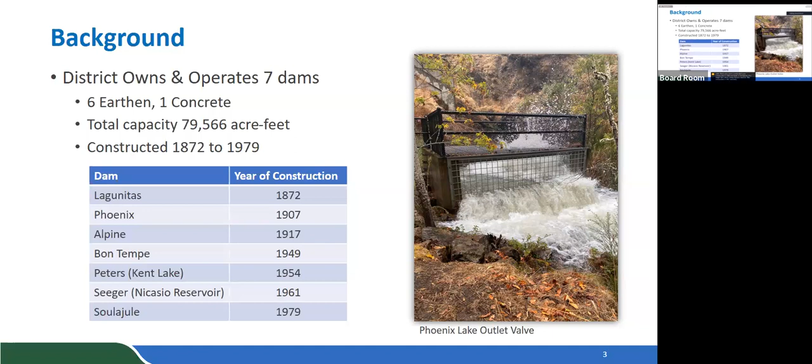Jumping right into our dam safety program. Our dam safety program has several components, each of which will be addressed in the following slides. Monthly district inspections, annual Division of Safety of Dams or DSOD inspections, real-time monitoring, and emergency response. On a monthly basis, district employees visit each of the district's 7 dams. While at the dam, they conduct a visual inspection, looking for anything that may jeopardize the dam's integrity, like animal burrows, overgrown vegetation, large holes, or slumps.

They measure the piezometers for verification of the hydrostatic forces within the dam. The map on the slide shows the 17 piezometer locations on Peters Dam. Staff also measure seepage through the dam to identify any changes from the norm. Monthly inspection is used to determine when vegetation management crews are needed. Information from this visit is documented and reviewed by engineering to look for abnormalities, which there are typically none. This data is compiled and submitted to DSOD as part of the annual report.

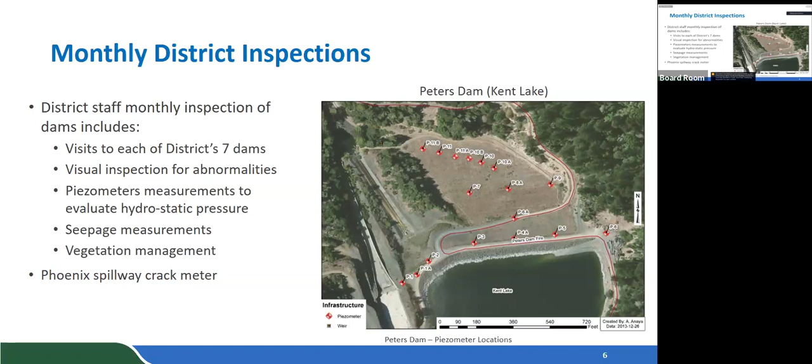On Phoenix Spillway, a horizontal crack was identified in 2005. Since then, monitoring equipment has been installed to track that it is stable. Every year, district staff meet with the Division of Safety of Dams representatives at each of the district dams. While on site, a visual inspection of the dam is conducted with the intention of identifying both changes and potential improvements. A discussion of the district's annual report allows for DSOD to clarify any measurements or comments from monthly investigations.

Emergency valves like the inlet and outlet valves used to drain the reservoir are cycled on a staggered 3-year basis. The images on the screen are of Alpine Dam, original construction in the top and current picture on the bottom. Alpine Dam was constructed with inspection galleries, which are entered every 5 years. The picture on the left is from the recent gallery inspection done this last September. The most recent instrumentation report or annual report was submitted in June of this year.

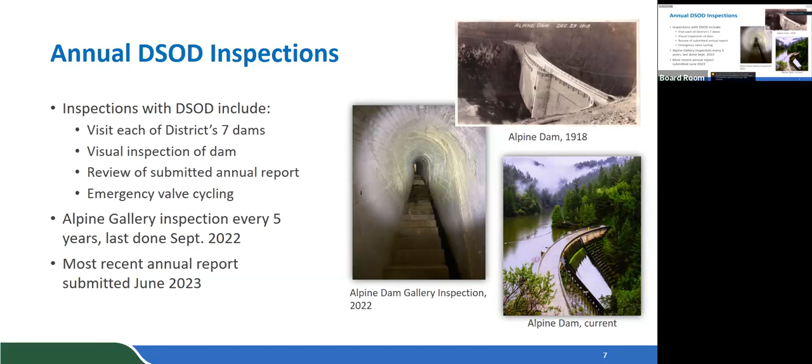We are monitoring our reservoirs in real time through our SCADA system. While monitoring is helpful, alarms have been introduced to notify operators of abnormal situations like high or low lake level or rate of change. In addition to water surface elevation or lake level, we are virtually keeping tabs on flow rates like transfer pumping and stream releases and rainfall. Alarm set points can be toggled if the operator wants to keep a closer eye on any particular reservoir.

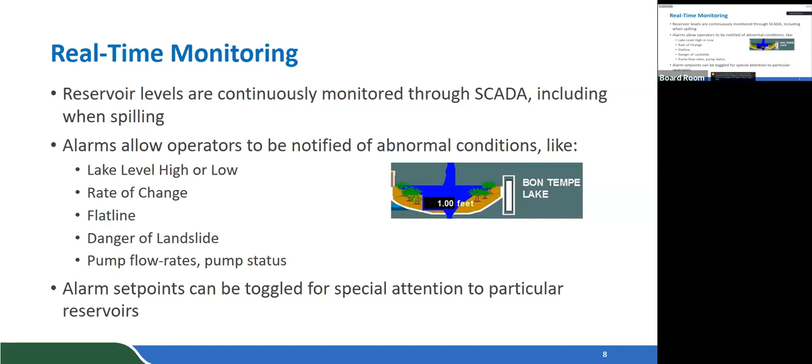Dam emergencies can vary in severity, from a mere flow-related notification to catastrophic failure, or nearly catastrophic in the case of Oroville in 2017, pictured on the slide. In line with the California Office of Emergency Services, or Cal-OES, the district has planned for dam-related emergency response using a few approaches, including the Emergency Action Plan, which lays out the response process for dam-related emergencies, everything from signs and symptoms of a dam emergency to coordinating an emergency response.

Inundation maps show the predicted emergency areas using computer modeling to be used for things like planning evacuation routes and notification lists. Response development involves coordination with many stakeholders, like the County of Marin Office of Emergency Management, to local emergency responders, to Caltrans, to the National Weather Service, and more. Routine tabletop exercises to keep emergency contacts up to date and practice of emergency notifications.

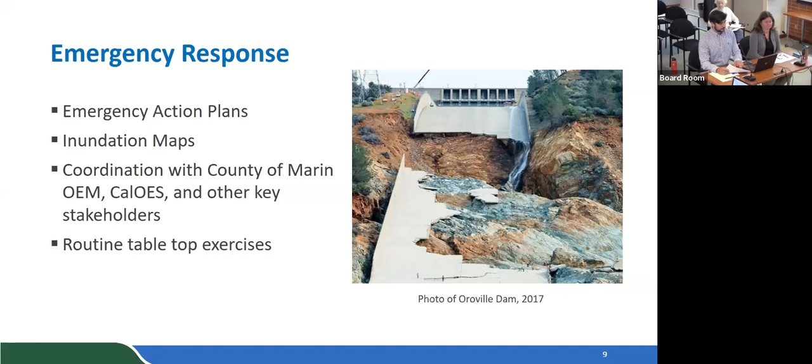Pivoting to condition assessments. Following the Oroville Dam failure, DSOD ordered the detailed evaluation of 93 dams throughout California, which DSOD believes is similar to Oroville Dam, focusing on evaluation of the concrete lining, the existing drainage system, and any potential for slab undermining and hydraulic jacking. The 3 district dams identified were Soulajule Dam in the top call out on the map, Seeger Dam, the middle call out on the map, and Peters Dam, the bottom call out on the map.

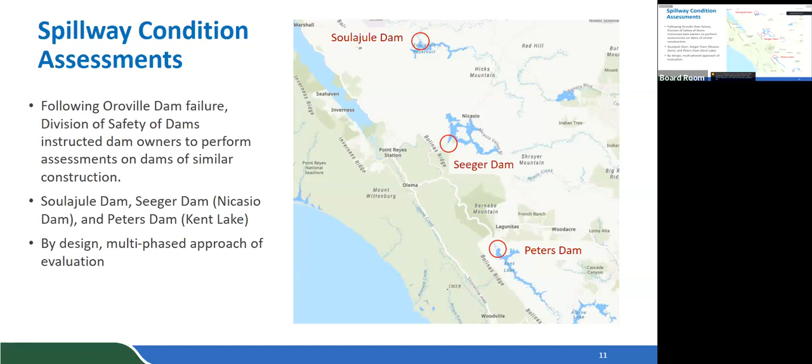In response to the evaluation mandate, a work plan incorporating both condition assessments and site investigations and a phased approach was developed, which DSOD approved in 2017. The district retained AECOM Technical Services to perform the Phase 1 assessment. Beginning in 2017, AECOM began Phase 1 evaluations through a desktop analysis of records data, including as-built drawings, boring logs, design features, previous inspections, and repair records. Simultaneously, a site visit was conducted to identify any visible deficiencies.

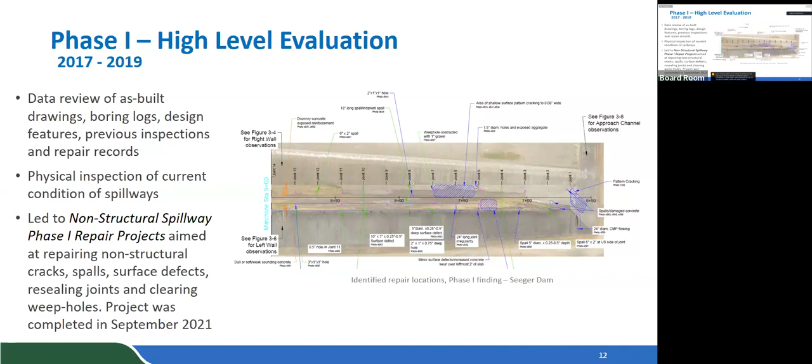Phase 1 identified specific locations for non-structural repairs, including cracks, spalls, surface defects, joint sealing, as well as weep hole clearing, all of which DSOD considered regular maintenance. These repairs were addressed in the non-structural spillway Phase 1 repair projects, which were completed in September of 2021. Phase 2 work plans, approved by DSOD in March of this year, will obtain additional field information as part of the comprehensive assessment to evaluate the current condition of our spillways. This work is expected to be completed in the fall of this year.

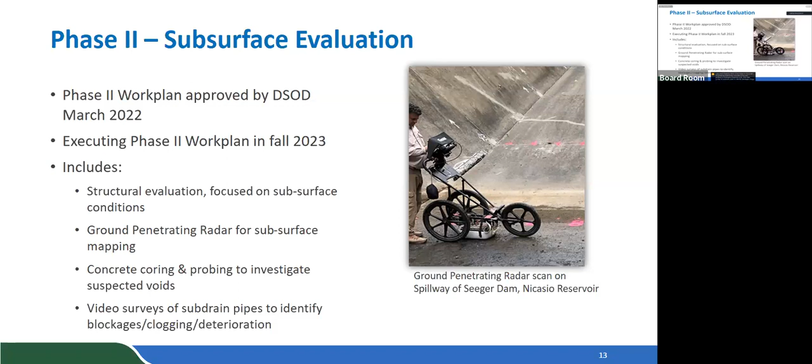The annual assessment completed by DSOD typically results in findings. To date, DSOD has determined all dams are safe for continued use. This is consistent with the monthly data that staff collect, which shows no significant changes in monthly piezometer, seepage, or leakage readings, which are reviewed regularly to identify anomalies. There are no observed changes in structural integrity. There's no significant horizontal or vertical movement in land surveying data collected annually.

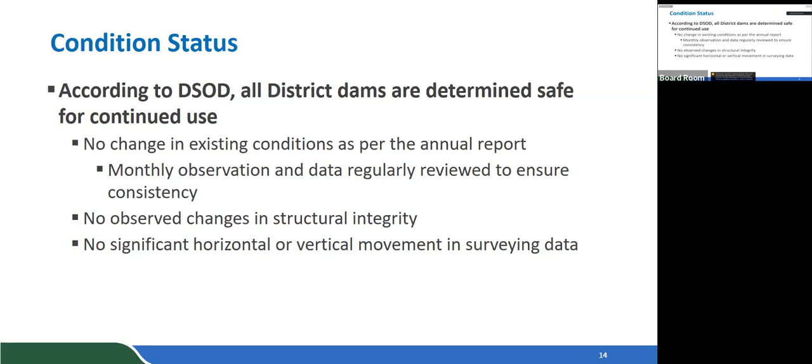Last month, the County of Marin grand jury published a report titled Dam and Reservoir Safety. Staff is still assessing the report findings and recommendations. Staff will come back to the board at an upcoming meeting with a prepared response. The underlying idea of the report identifies concerns over climate change and atmospheric rivers and effects on dams, specifically spillway capacities. The district will be hiring a dam expert to provide high-level support relating to spillway capacity analysis.

Shifting gears to routine preventative maintenance. Maintaining our dams is a lot of work. To name a few tasks in support of this effort, vegetation management is done annually and as needed. We remove logs and debris, like the picture on the right. Removing log booms is a frequent winter activity during and between storms. We exercise valves. We inspect valve actuators and clear trash racks.

We replace boulders and ensure the riprap is preventing erosion from wave action, which is the picture on the left. Other projects are done as needed and per the state inspections, like minor spillway repair, weir maintenance, and piezometer replacement. All maintenance work is done in coordination with DSOD.

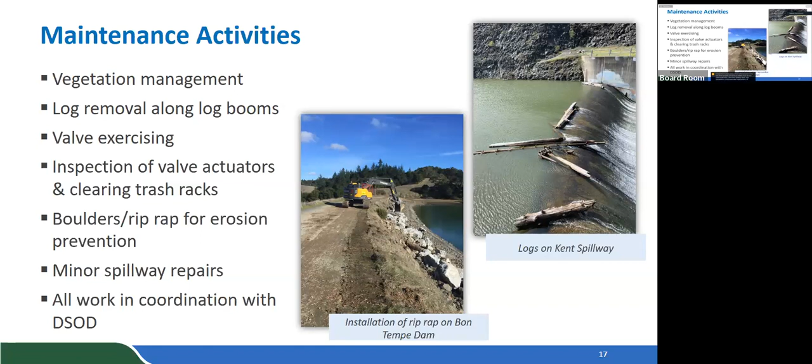Next steps include executing the Phase 2 condition assessment work plan and following up with DSOD on the results. Continue the review process for updating our dam emergency action plans, or our EAPs, and prepare a response to the grand jury report and report back to the board.

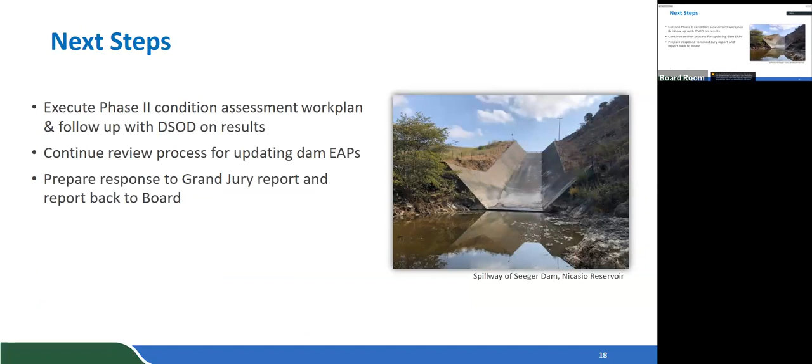Do you agree with the DSOD's characterization of our 3 dams as being similar to Oroville after doing this work? That's a good question. Thank you.

I don't know that I have enough information as to why DSOD determined those 3 dams in particular. Do I think it's a good idea to do some sort of additional investigation? I don't think it would hurt at all. I would say the one that differs slightly is the Soulajule with that big bowl at the bottom of the spillway. It's definitely a slightly different design

than Oroville. However, all 3 of those spillways that are being assessed are embedded in the earth, similar to the spillway at Oroville. So we can't see underneath them without invasive condition assessments such as borings. And the other spillways, other than Bon Tempe, you can see underneath. Lagunitas, it's a raised wooden chute. You can see the spillway underneath. Same with Phoenix, although it's concrete, you can see underneath it. So you can tell if it's leaking or if there's a crack.

Any other questions? Yeah, I guess I'm curious, did the grand jury reach out to the staff to get our assessment of how we're doing? It seems like they had quite a few judgments, but I'm wondering how deeply they talked with us. I believe unless there was discussion outside of that I'm aware of, we just got a draft report and I think that was similar to North Marin. And we did provide some comments on the draft, some of which were accepted in the final report.

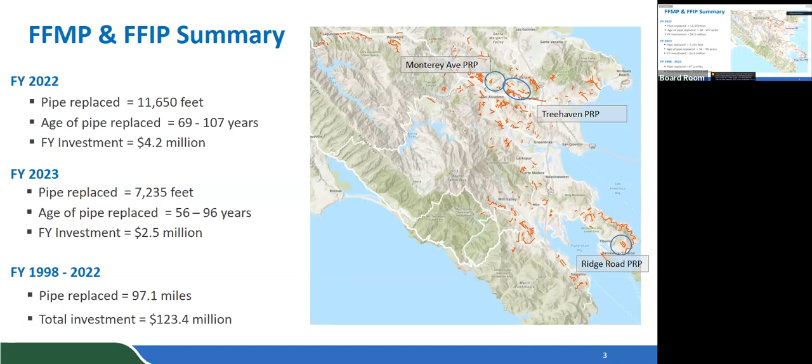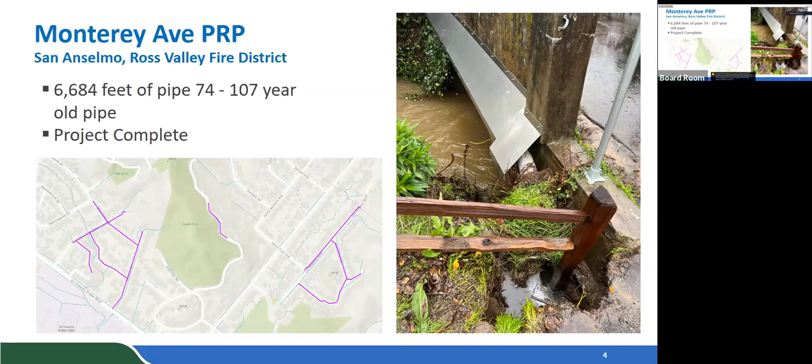So now we're going to take a brief look at each of these projects. Monterey Avenue PRP replaced 6,684 feet of pipe ranging in age of 74 to 107 years old in San Anselmo at locations identified in purple on the map. The picture on the slide shows the new pipe covered in a white wrapping crossing a bridge and the metal guard installed to protect it. Ridge Road PRP replaced 4,966 feet of 69-year-old pipe with a mixture of welded steel and high-density polyethylene, or HDPE pipe, in Tiburon at locations identified on the map. The picture on this slide shows the pipeline in blue prior to replacement.

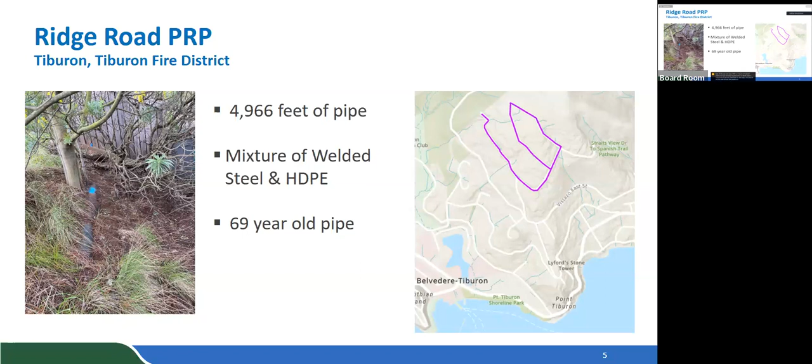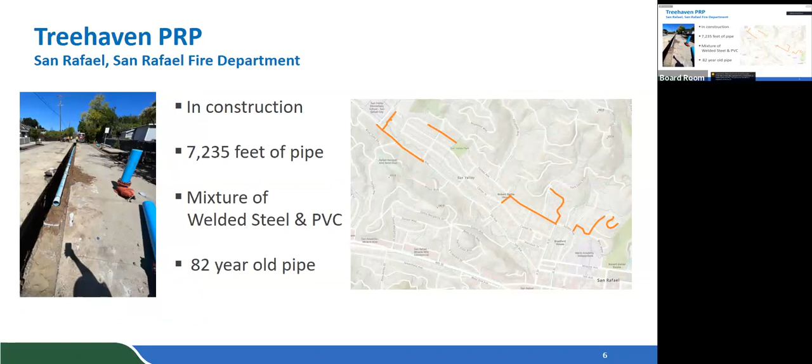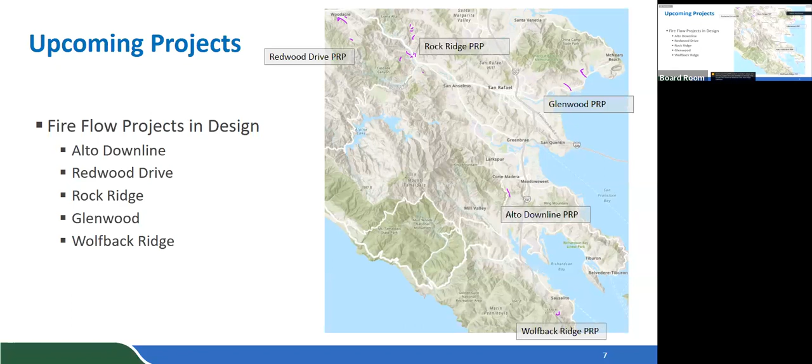Treehaven PRP in San Rafael is still in construction. By the end of the fiscal year, 7,235 feet of pipe was replaced with a combination of welded steel and PVC. The picture on the left is a snapshot of the trenching, the replacement process. We have several upcoming FFIP projects currently in design and planning stages, which are identified on the map. They include Alto Downline, Redwood Drive, Rock Ridge, Glenwood, and Wolfback Ridge. And that is a much shorter presentation.

What do you see happening in the long run with fire flow? Long run? Well, we've still got 7 or 8 more years within the program itself. Are you asking about after that? Yeah, I mean, I thought your description was not quite what I recall being the fire flow, it had more to do with pinch points, because hopefully we're not depending on fire captains to determine what seismic risk is in our piping system. But the pinch points, we must be closing in on eliminating the bulk of them. I also found it interesting that you appear to be replacing PVC pipe, the blue one. If that's the way it was buried, obviously there's a problem with the way it was installed. Is it just too small?

Yeah, the pipelines were identified because of the sizing, too small for fire flow needs. Yeah, and that was kind of an error when we put it in, because the fire flow need would have been the same, presumably. Right. I'll have to get back to you on the material of the blue pipe that you saw. It may have been wrapped steel. Oh, okay, that would make more sense. It might not have been PVC, but I'd have to get back to you on that.

But in terms of 7 to 8 years from now, I can project that we will not have completed all of the pipeline projects identified in the original master plan due to increased costs of construction. There's no inflationary factor in the parcel tax. It remains at $75 a year. So when we hit 7 to 8 years, we'll have to take a look at what's left in the master plan and whether or not the board wants to extend that program.

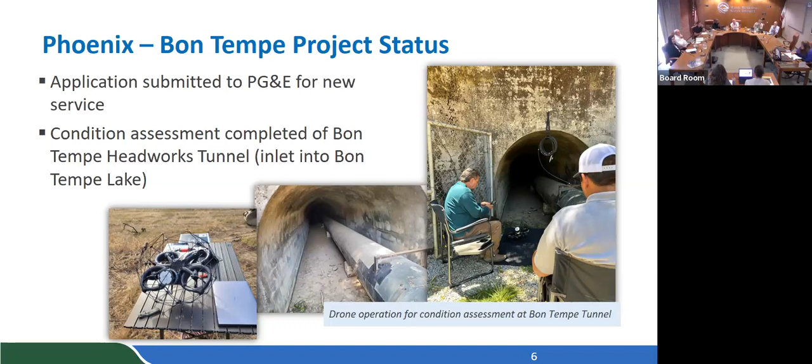And Crystal, this tunnel connects Bon Tempe to the treatment plant? Yes. And where, if you could go back to the map, the drone operators, where are they sitting? At the entrance. So the tunnel is approximately 1,200 feet, right at the inlet where we pull water from Bon Tempe Lake, and it goes to the Bon Tempe Water Treatment Plant. So there's access points on either side of the tunnel. We actually had to fly in both directions because the drone with all the instrumentation only had like a 10-minute flight time on the battery. So we got about 75% of the way in on one side and then had to go to the other side to get the other 25% mapped out. But there are 2 access points.

It looks like pretty rough terrain to get this thing in there. It looks like you're going down a drainage gulch or something, huh? Yeah, it's about 6 to 8 feet wide, most of the tunnel. It does narrow into a fairly small chamber once you get pretty much under the lake itself. But we are investigating that wider area. And I think if we deem the existing riveted pipe to be of condition to be replaced, it would be a good opportunity to add that to this project. It may also allow for better positioning of the new pipe, as having an existing 24-inch pipe only leaves limited area to install the new pipe. So it would give us a chance to install proper base and rollers to allow for better future maintenance for the existing and new pipe.

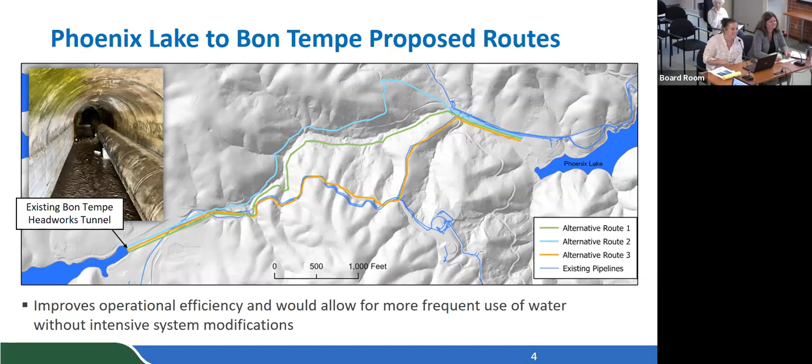So it will be challenging terrain, but it's not anything that we haven't done before. And if it's on the fire road, it's a little easier. Yeah. So I do think that all of the alignments, while they haven't yet been finalized, are doable. Our engineering staff is still evaluating. I would hope so. I didn't think you'd propose something that's not doable. Yeah. Thanks.

So moving on to Soulajule. Maybe, Alicia, so we will be seeing, I guess, the specifications for the contract with Kennedy and Jenks. Yes. So we executed a minor contract just to sort of get the conversations going, to reach out preliminarily to the County of Marin to facilitate some collaborative discussions.

But prior to getting into any real in-depth pump storage or hydrology, we will be coming back to the board in the coming months to really discuss the scope of the larger contract. Great. And we anticipate it to culminate in a basis of design report.

So Alicia, when you do present the detailed scope of work, as you well know, I'm really interested in pumped storage. I think it'd be helpful if you could provide a primer or background, because there may be an impression that this is a form of power generation. It's not so much, right? It's actually replacing batteries for storing solar power.

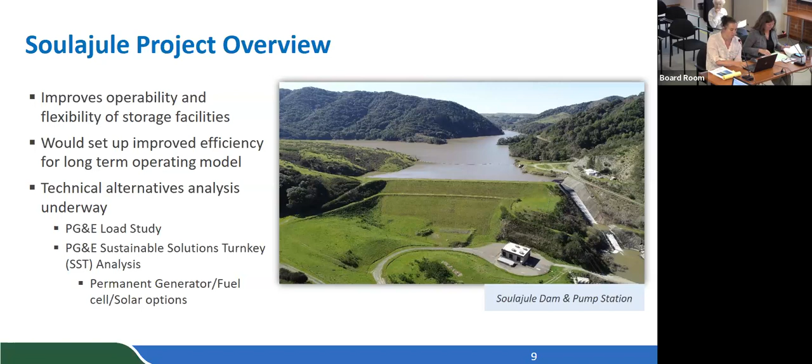We've met a few times with the sustainable solution team and conducted a site visit with them at the reservoir. We met twice in May to discuss the 4 alternatives they've come up with. One is to rent a 1 megawatt generator to allow operation of one of our 800 horsepower pumps. Another is to install a permanent generator at that facility. The third is to install up to 2 megawatts of floating solar at the reservoir. And the fourth is the installation of batteries or fuel cells at the site.

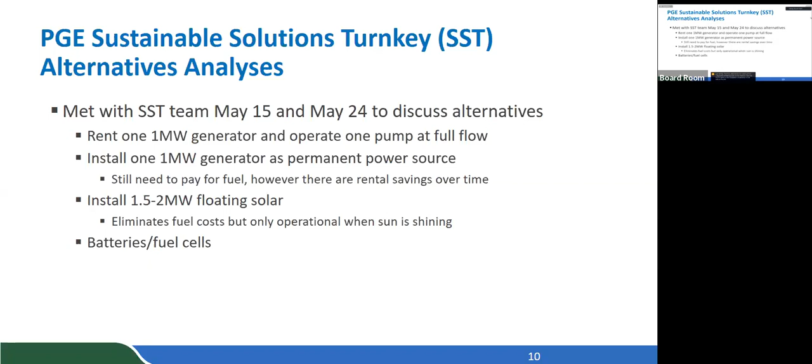The sustainable solution team evaluated all 4 scenarios against the current case, which was renting 2 generators at a cost of $1.3 million in 2021. The rental of the 1 megawatt generator or the installation of the 1 megawatt permanent generator both result in continuing diesel and CARB considerations, while they were projected to be, at least initially, a little cheaper than the rental of the 2 generators.

The installation of the solar, while more environmentally friendly, has an operating consideration in that there's limited hours of operation. We would only be able to operate our pumps while solar is being generated, during sunny daylight hours, which may not coincide with our optimal operating model, and we could not, for example, operate our pumps at night if we so chose.

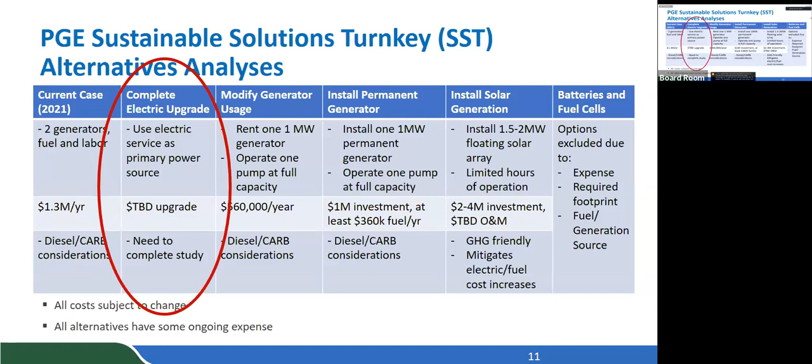And the fourth alternative, the battery and fuel cell option, was excluded at a very high level due to the expense, the footprint, and the needed fuel and power generation source. This led the sustainable solution team to encourage us to talk with the service planning side to explore the feasibility of getting electrical power out there, which led us to further discussions with the service planning team.

Our most recent discussion was in late June, at which they informed us they have been running 2 different technical alternatives. One of which is to allow us to run one of our 2 800 horsepower pumps at a 100% load at any time. And the second study was looking at allowing us to run both of our pumps at 100% load, but only at night.

The first study is looking quite favorable, at least from a preliminary result perspective, and that it would only require PG&E to upgrade some of their regulators and fuses. So it's looking like a very feasible path at this time. Whereas the second study requires major reconductoring of the system, and it would require major PG&E upgrades on their side of the meter.

Both of these studies assume the installation of variable frequency drives or VFDs at our pumps. So we're in the process of obtaining an electrical engineer to evaluate whether the variable frequency drives are compatible with our existing pumps and motors. So in any case, there will need to be a major project on the district side of the meter to make sure that our pumps are compatible with the PG&E power.

What's the voltage on the motors? I believe they're 480. Just to put things in perspective, a megawatt seems a light to me for 800 horse, give or take. I mean, you need a little more than that because it's 746, right? So, you need a little more oomph than that to run an 800, at least at full. Mhm.

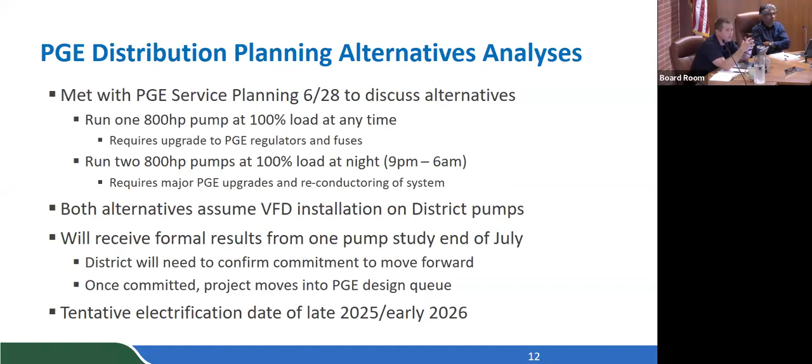I would just follow that up by saying, this project I'm torn a little bit about because it's so nice to get away from the diesel generation, especially the trucks going out over and over again, and then the operational benefit as well. But I really feel like we'd be missing the boat if we can't get some sort of clean energy piece into this, or at least have it all ready to go. So once we get the electricity out there, we can add that relatively soon, because this seems like a really good place to do that. And we don't have a lot of really good places. So I'd like to take advantage of them where we can.

Yeah. One of the challenges of this particular site is that we don't own a lot of the neighboring property. So we are really constrained, for this particular site, to have the solar be on the reservoir itself. I do think, as we previously discussed for the pump storage, we move a lot of water. We have the opportunity to look at other sites to aid in our clean energy generation. I presume there's no gas out there. No, there is no gas.

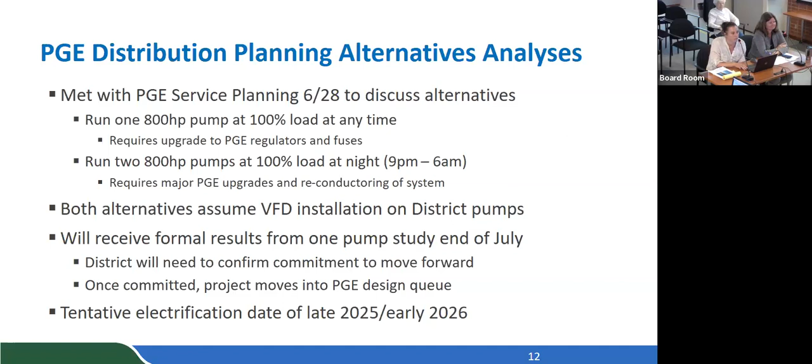So some of our next steps for this project, like I mentioned, are to enter into a contract with an electrical engineer for technical support. We are also going out for an RFP for the discharge pipe design to help us minimize the water loss in the conveyance of water from Soulajule to Nicasio. Currently, once it's pumped from Soulajule, it travels over land for about 2 miles in a dry bed. So to get a dedicated pipeline out there.

We also will be meeting with PG&E in the coming weeks to understand the various options that we have and the results of the current study that's underway. There is a tentative project completion date of late 2025, early 2026, but this does largely hinge on PG&E as the critical path. We are also looking at various funding opportunities, talking with local legislators about this project for potential state appropriations, as well as the U.S. Army Corps of Engineers for potential WRDA funding.

Thank you, Alicia. Thank you. Board comment? Public comment? Go ahead.

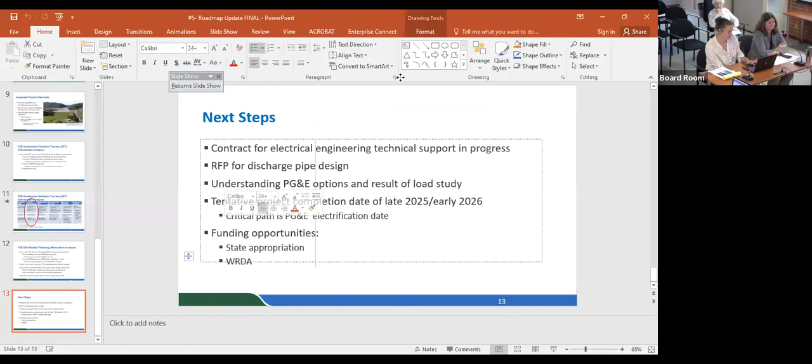Yeah, I'm hopeful that as we look at the Army Corps of Engineers money, we'll articulate this as kind of the beginning phase of a longer term project. We've been told that money is going to be guided our way. But I think this really is just the beginning of a regional approach to increasing our water supply, increasing our storage. And as we get our first hooks in here with them, I think we can build a stronger, longer term relationship that'll be really important in the coming years.

I would echo what Jed just said, and I would say further, I really do think these updates are extremely important to the public. There are different venues where we can talk about these and provide updates. I really do think our general board meetings at night are better attended by the public; it's easier for people to attend in the evening. I know we were talking about having regular updates on our water supply resiliency work, and this is a component of that. So maybe a shorter presentation of this can be made available at our next regular board meeting.

Yeah, that's exactly the plan. Our planning for updating the board and the public on our water supply roadmap is that at every operations meeting, to the extent we have information, we'll give a deep technical dive on some component or project like we did today. And the first meeting of the month, in August it happens to be the second, will give a broad overview, including summaries of where we are on these projects.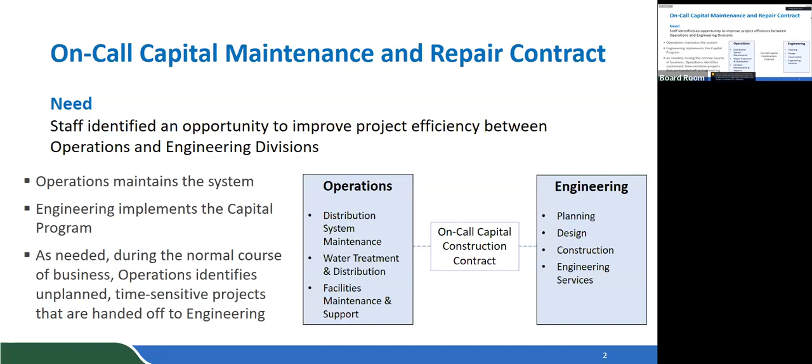And as needed over the course of normal operations business, smaller projects are identified from time to time that may need engineering support. And so when that occurs, these projects are unplanned and brought to engineering for development of a small construction contract. So we're proposing an on-call contract that will help bridge the gap between our engineering and operations divisions. This on-call contract is very common in the industry with various cities in California, utilities, and Caltrans. And it's designed to identify some of these smaller unplanned projects and improve efficiencies between these departments.

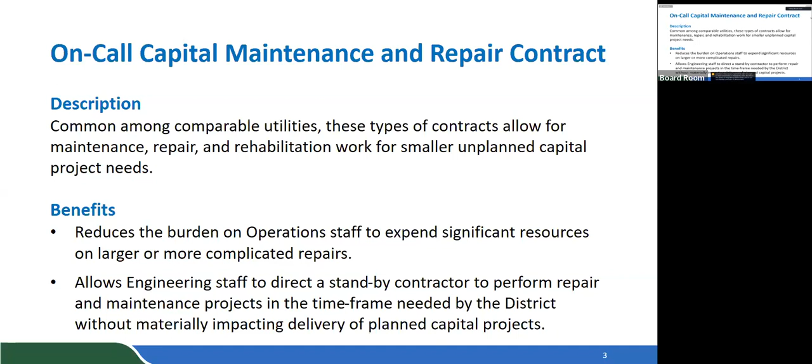Since these types of projects that are identified by operations range in cost between $50,000 to $100,000, we see some losses in productivity when we go to develop a construction contract, advertise and deliver, and then ultimately execute. The cost and the time to deliver a $50,000 project is often quite similar to one for a $3 or $5 million contract. And so a couple of basic benefits are that, of course, it reduces a burden on our operations staff when they need to expend significant resources on projects that might be larger or more complicated or infeasible for them. But it also allows our engineering staff to direct an on-call or standby contractor to perform work without impacting our commitment to deliver our planned long-term projects.

And so what does this contract look like? Basically, it's what's known as a force account contract or a time and materials contract. Essentially, work would be identified on demand as needed by both the engineering and the operations departments. Once a scope is identified, a contractor would then be directed to perform that work, and all of their equipment, their materials, and their labor would be tracked by our construction management team and our inspector. And then the contractor is paid their direct rate or their cost of performing that work, plus a reasonable and fair markup as identified by the Department of Industrial Relations prevailing wage rates and Caltrans published equipment rental rates.

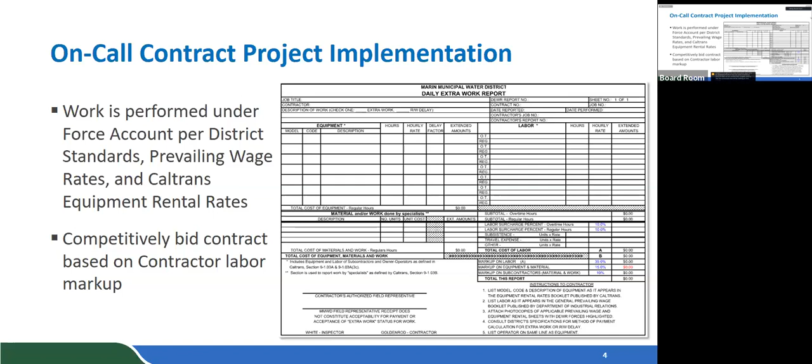So this is a... I'm a little confused. Are you talking about a contractor or a consultant? Sure. This is an on-call contract for construction services. So build it. This would be Public Works. Yes. And so this is a competitive contract. So the mechanism by which the contractors would compete is the labor markup. The image on the right is our daily extra work report, and it's essentially the form that we use to track force account labor on our construction projects. And so the contractors bidding on this project would be bidding based on their labor markup. Their profit. Yes, profit and overhead, things of that nature.

So a quick touch on the schedule. We did advertise the project on July 18th. We intend to open bids on August 1st. And if the board does support a project such as this, then we would plan to come to the board on August 15th for a recommendation to award. The contract is a 2-year contract with an option to extend the contract for up to 2 more years at 1-year increments.

And do you think they're going to bite? We have seen quite a bit of interest in this contract. Small contractors or small and large altogether? Yes. So we're excited to see what kind of efficiencies and opportunities this contract might provide. And does it extend to design build, or we design it and they build it? Yeah, that's exactly right. It's kind of a quasi design build, but we are the designers.

And what we've seen in engineering is that the technical design, which would be performed under these types of projects, only takes a matter of a few days to a week. It's really that loss in advertising and executing a contract with a contractor.

And again, these are projects that are common to what we do day in and day out. And we're trying to address this specific project that's unplanned, that comes to engineering. So we're trying to accommodate the needs of our operations divisions who can't take on certain projects because they might need an engineering solution, for example, but then also allow our staff to be focused on our long-term capital program.

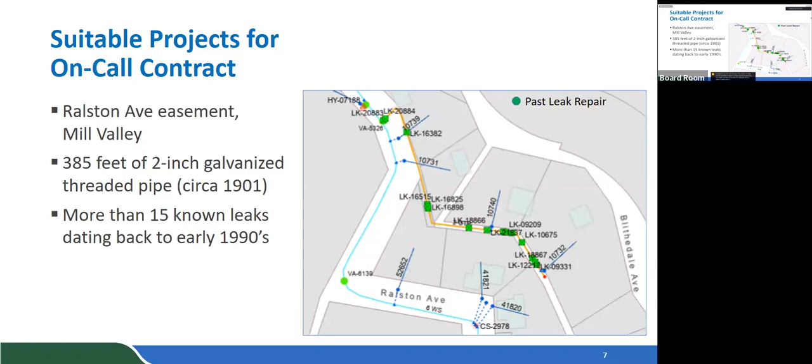And so this is the type of project that might be suitable for our on-call contract. It might not be suitable to add to a larger capital project, and one might not be in the area, for example, and it doesn't really serve a productive purpose to be a standalone contract. And it's not identified in fire flow? No. Interesting. Yeah, it's a good point.

Do you think that's because there's not enough people there? Not enough houses? I mean, 2-inch line, pretty small. Right. Yeah, the fire flow master plan, as we learned, was developed based on hydrant flows. So perhaps there's not a hydrant connected to this 2-inch line. Perhaps there should be. Yeah.

Certainly. So a couple of photos of that same galvanized 2-inch pipeline. The photo on the upper right is actually a failed repair clamp. There should be a threaded rod that's providing a compression fit of that repair over a leak. So those are load-bearing cobwebs you see there. In the lower left, we've got 7 leak repair clamps over just a 5-foot section.

And really what we're trying to demonstrate here is each one of these clamps represents a field crew going out, mobilizing to the site and making repairs, interacting and responding to customer concerns, everything. And so this is the type of project we would target for the on-call. But the nice thing is now it's all stainless steel.

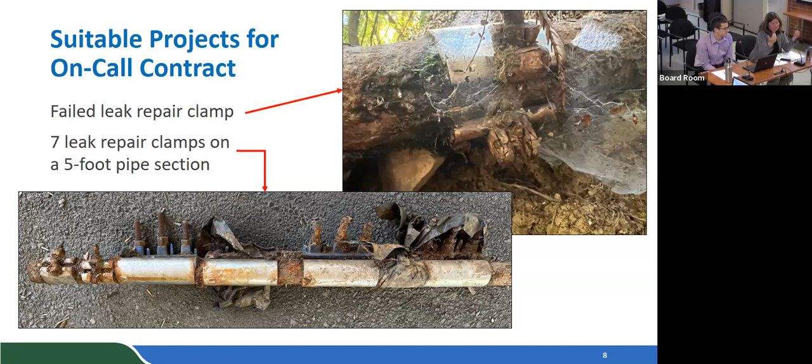That's an excellent point. Actually, I would be remiss to not point out that our operations staff recently have been replacing large sections of this pipe with new 2-inch copper. So they're making some great progress as well. Right. But when he says sections, we're talking 30, 40 feet. The entire length is 385 feet, which would be a much larger project and take up a lot of their time. So, yeah. Well, 40 feet at a time, you'll get there.

All right. So one more quick example is a culvert repair in San Rafael. This is off Bayview Street. We responded to a leak on a water service, and our crews needed to access that water leak to make a repair. The utilities in that neighborhood are actually going through the culvert. And in order to access it, of course, they jackhammered the roof of the culvert, which required an engineering design.

It was not something that could be readily repaired in the field. So the project came to engineering, and we developed a design. We did calculations on rebar development. We established a plan for false work, steel false work, and then of course the concrete, and advertised the project.

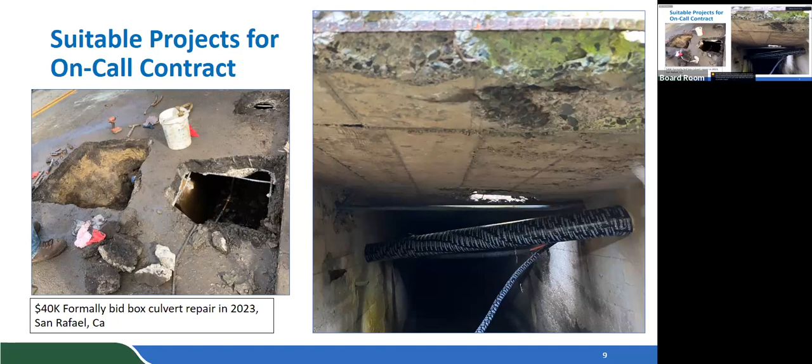And that took just over 2 months. The technical took only a day or two. And the formal bid came in just under $40,000. And so this is another project that we think would be suitable for this proposed on-call. And with that, we'd be happy to answer any questions.

Thank you. Questions? Yeah, sorry, Monty, just to clarify the difference between on-call versus standalone projects, is it the size that some of these wouldn't qualify? No, not necessarily. It's just essentially this on-call is kind of a retainer contract. So we will have a contractor on retainer available to perform work upon a certain notification period. We're noting 15 days of notification, and then they mobilize. And so it allows us to be flexible and nimble in addressing these unplanned needs with a competent, capable contractor in a very efficient manner.

So if I could, the example of the culvert box, a $40,000 project, instead of having to put together a bid package, get it on the street, review bids and award, you just go right to the on-call contractor, give them the design and get the work moving. And if I can add, it's a way to comply with the Public Contracts Code requirement that we go out for a competitive bid contract. This is going through a competitive process, but it will also allow us to mobilize flexibly under that. Once it's competitively bid, we can draw upon that as we need.

Just one more question is, in these types of retainer arrangements, there's always a risk that the group that's going to do the work is just not available because they're trying to balance multiple requests. And sometimes a request comes in and I'm guessing that's hard to plan against. We do our best to identify groups that we believe have available capacities even during busy periods. But how do you think about that? There's something, an emergency, and they're just not available. And we certainly did think about that. That's a great question. It is one of the challenges with a contract of this nature.